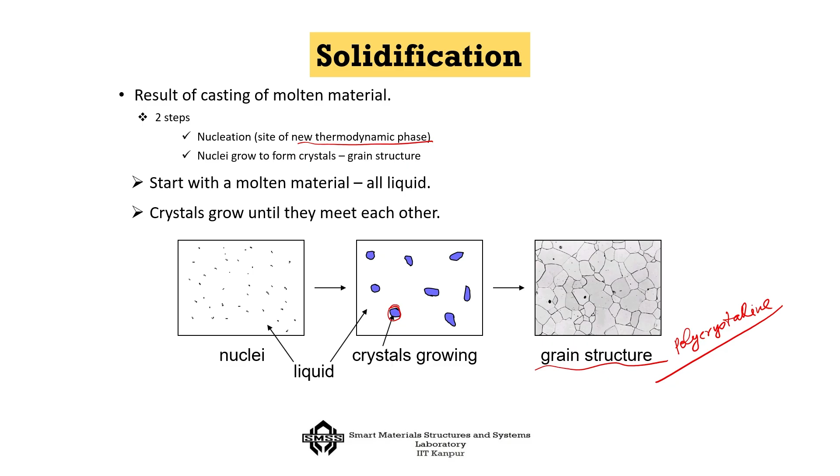We only prefer growth in one direction. Otherwise, crystals will grow and you get a grain structure which will be essentially polycrystalline in nature. This is generally what happens when a crystalline material solidifies from the molten state.

Now, what happens during that process? This process is invariably followed by defects, because even if the crystals are highly ordered, not everywhere is it getting cooled at the same rate. Because of the unevenness of the cooling rate, some parts solidify before others, so there will always be some defects coming into picture.

There will always be some deviation from the ordered arrangement, and this is the defect or imperfection in the crystal. What is most interesting is that these go both ways - the presence of imperfection may be bad in terms of failures, the strength may come down, but in some cases it can actually give very interesting good properties to the material.

The concept of alloying may also come up because of it. So it is safe to say that properties of material are influenced by the presence of imperfection. Mechanical properties of pure metal change significantly when these imperfections are present.

For example, long before, it was noted that if molten iron is solidifying and by chance carbon goes inside, then you get higher strength. Yield strength of pure copper is only 117 MPa, very ductile. But add some 30% zinc to it, you get brass, and the yield strength immediately improves to 200 MPa.

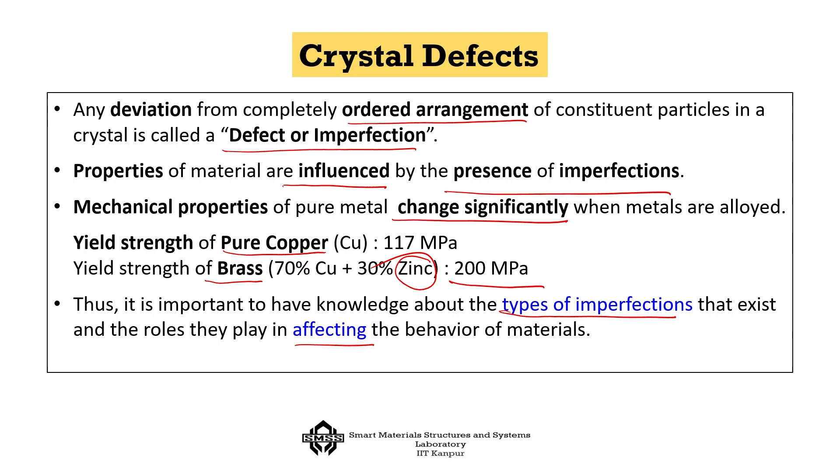So we should not always say that imperfection is bad. Sometimes if we have proper knowledge of what impurity we are adding to the system, it may actually help us. This is why it's important for us to know the types of imperfections and how they affect the behavior of materials.

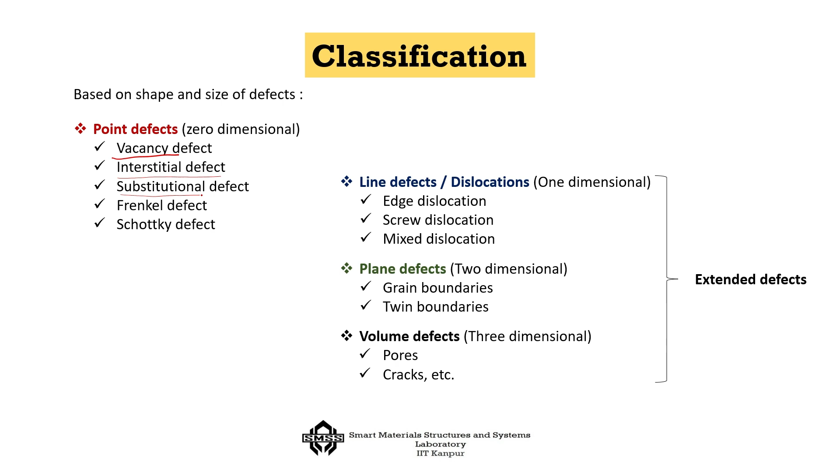So we are going to classify the defects: point defects can be of different types, like vacancy defect, interstitial defect, substitutional defect, Frenkel defect and Schottky defect - we will talk about each one. Then the line defect or dislocation, like edge, screw or mixed. Then the plane defects, like grain boundaries and twin boundaries, and then volume defects, like pores and cracks - these are three-dimensional defects.

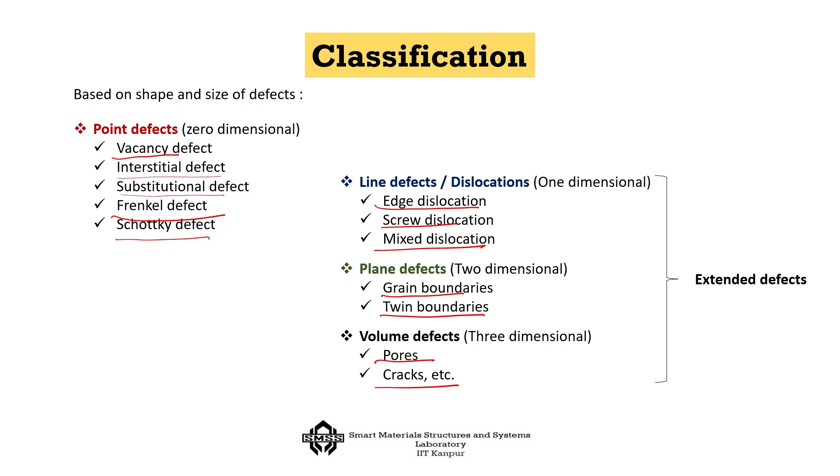So let us start with the point defects first. These are associated with the atomic sites. The very first point defect is called a vacancy defect - when an atom is missing from its regular lattice site, it is called a vacancy.

It is impossible to create any material that will be free from vacancy - vacancy will always be there. So the presence of vacancy increases the entropy or disorderliness.

If there are more vacancies, then there will be more entropy in the system. This also decreases the density of the substance. If there are more vacancies, you can actually get a lighter structure. The concentration of vacancy increases in two cases.

One is when there is an increase in temperature, and another is when there is a decrease in the activation energy. If you look at the number of vacancies, there is a distinct mathematical relationship: if N is the total number of potential defect sites, then the number of vacancies is never equal to that total, but is a part of it, defined by an exponential term.

In that exponential, QV is the activation energy, K is the Boltzmann constant, and T is the absolute temperature in Kelvin. As QV decreases, the energy required for the formation of vacancies is affected, so there will be more possibilities of vacancies forming in the system. Similarly, if temperature increases, the same thing happens: more potential sites get filled up by vacancies. So decreasing activation energy QV and increasing temperature both control the vacancies in a system.

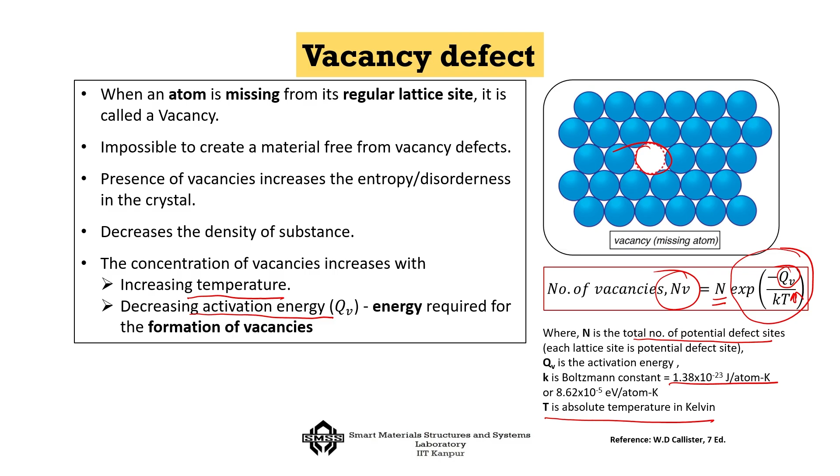Now, there can be a case where instead of just leaving a vacancy, the atom has to go somewhere. So it jumps somewhere else inside its regular lattice, crowding into some place. This is called a self-interstitial defect — it is not only vacant, but it goes and jumps into some space, creating a local distortion.

This creates a relatively large distortion and strain. Once this happens not for the same atom but for a foreign atom, then it is not self-interstitial, but simply an interstitial site or interstitial defect.

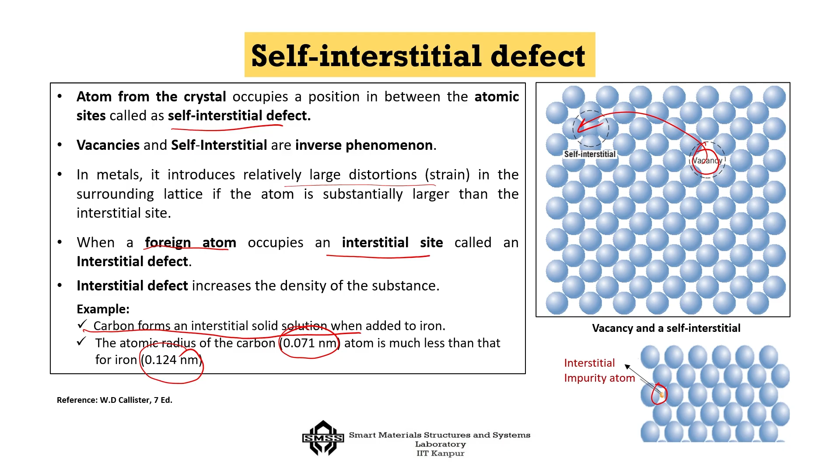Carbon forms an interstitial solid solution when added to iron, and in this case the distortion will not be much because carbon's atomic radius is much smaller, 0.071 nanometer, so it fits easily inside the space between two larger iron atoms. But if it is a self-interstitial, there will definitely be a local distortion in the system.

It is also possible to have substitution of one atom by another, which happens when the two atoms are roughly similar in size. A substitutional defect is introduced when one atom is replaced by a different type of atom. The crystal structures of both atoms must be the same, and they should have almost equal electronegativity, so that overall the atoms create an electrically neutral situation.

The substitutional atom can then occupy the normal lattice site under such conditions, giving you the substitutional defect. For example, copper at 0.128 nanometer gets substituted by nickel at 0.125 nanometer, and both are FCC, so essentially they can form a solid solution.

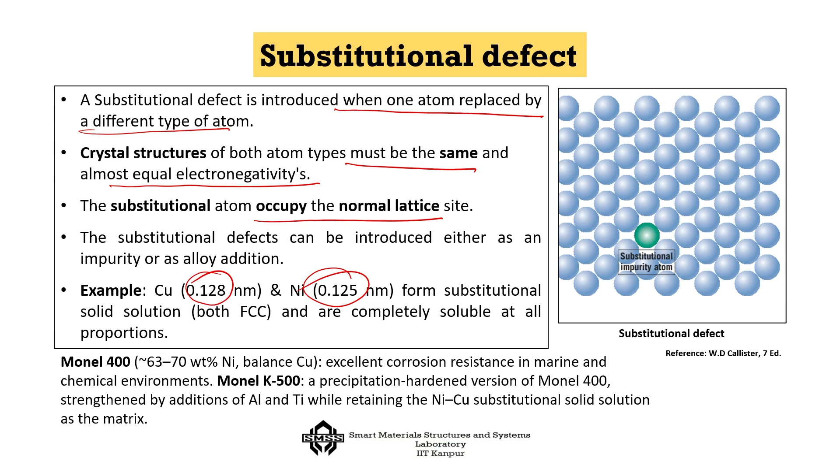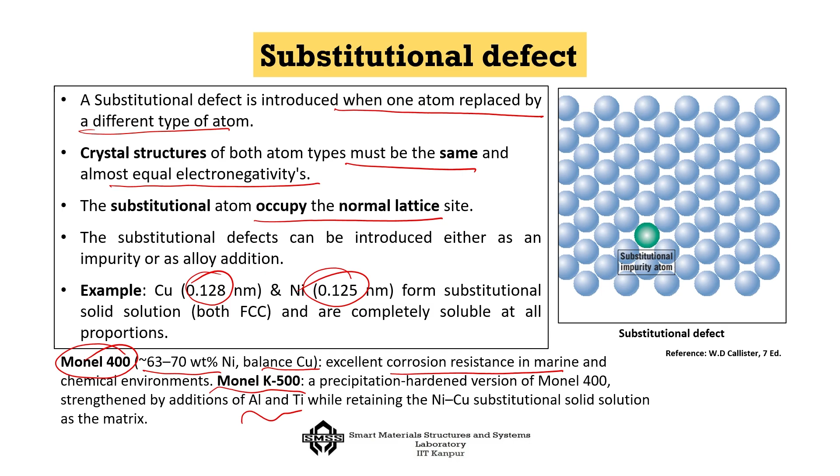We take good advantage of this, like Monel 400, which has about 70% nickel and the balance 30% copper, and is excellent in corrosion resistance in marine and chemical environments. Sometimes we also mix it with aluminum and titanium to get a new material called Monel K500, which is hardened through a process called precipitation hardening. So this substitutional defect sometimes has a very positive effect on a system.

Now there can be an effect called the Frenkel defect, which is a combination of vacancy and interstitial defect together. It occurs when an atom or ion leaves its regular site and occupies an interstitial site. Cations, being smaller in size, get displaced into the interstitial voids.

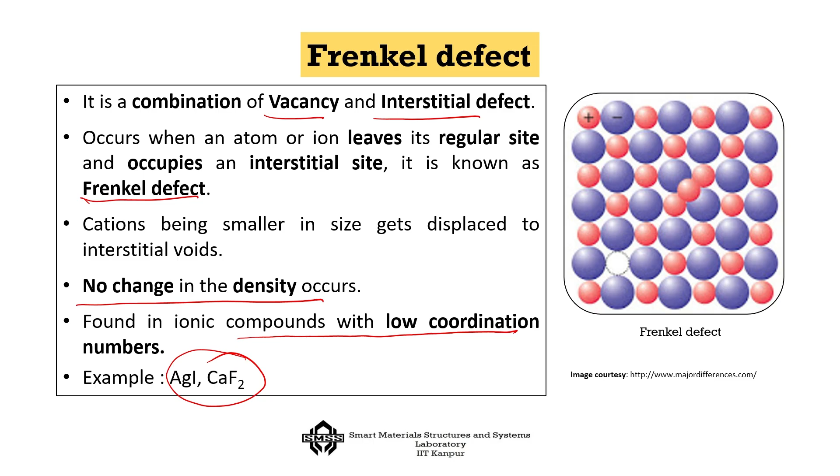No change in density occurs with a Frenkel defect, but it's found in ionic compounds with low coordination numbers, like silver or calcium with iodine or fluorine. You need this kind of ionic bond where the cation and anion can exchange itself. It's not important from our strength point of view, but can be important for other properties, like resistance change and things like that.

Another defect that is possible is called a Schottky defect. This is associated with a paired set of cation and anion vacancy, and in this case the density of the solid will be decreasing.

This is found in ionic compounds, not in metals, but in ceramic compounds with high coordination numbers. In order to maintain electrical neutrality, the number of missing cations and anions must be equal in such a case, for example in sodium chloride, potassium fluoride, etc. In both Frenkel and Schottky cases, no change in electrical neutrality of the crystal will happen, so it always occurs as a paired set.

There is also another very interesting case of point defect called the Wigner defect. This happens when there is nuclear radiation, and some atoms will be displaced because of this radiation. This can happen for any case, so it's most important for cases where nuclear moderation is done, such as in graphite. You need enough energy to cross the threshold so the radiation can shift an atom from its location to another. For graphite, a 1 MeV neutron striking graphite will create about 900 such displacements of atoms. This way you can absorb a lot of nuclear radiation power. The Wigner defect is actually good for absorbing radiation effects, and that is why graphite is used as a moderator.

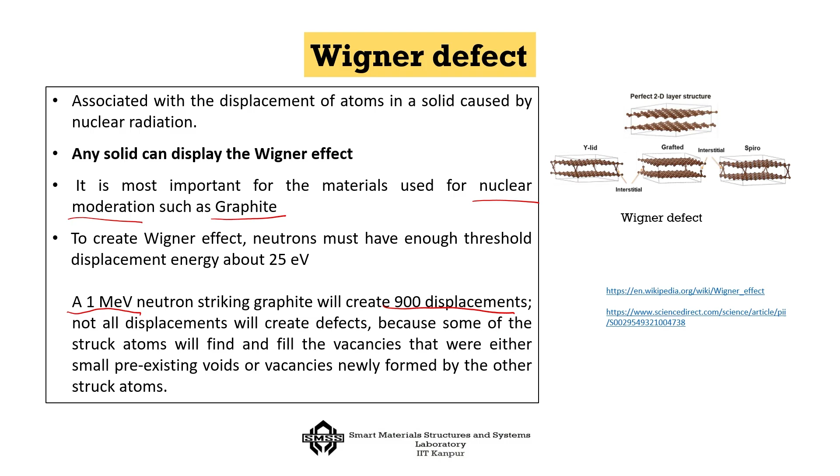Now I will talk about line defects or dislocations, which lead to plastic deformation of a system. There are two types, as I told you. The first is called edge dislocation, which happens with the introduction of an extra half plane of atoms. You can see that up to this point everything was fine, and suddenly there is a displacement and a half plane is inserted. This is where the dislocation is inserted, and this dislocation line is perpendicular to the plane of the page. The direction and magnitude of edge dislocation can be defined similar to our Miller index.

Here it can be defined with respect to something called the Burgers vector. You move around the dislocation line making equal steps in each direction. The vector that goes from finish to start is called the Burgers vector, and the edge dislocation lies perpendicular to the Burgers vector. So first you find the Burgers vector in a system. In this case you can see there is a slip plane, and you get the Burgers vector around the slip plane, with the dislocation perpendicular to the slip plane. This is what an edge dislocation is in a system.

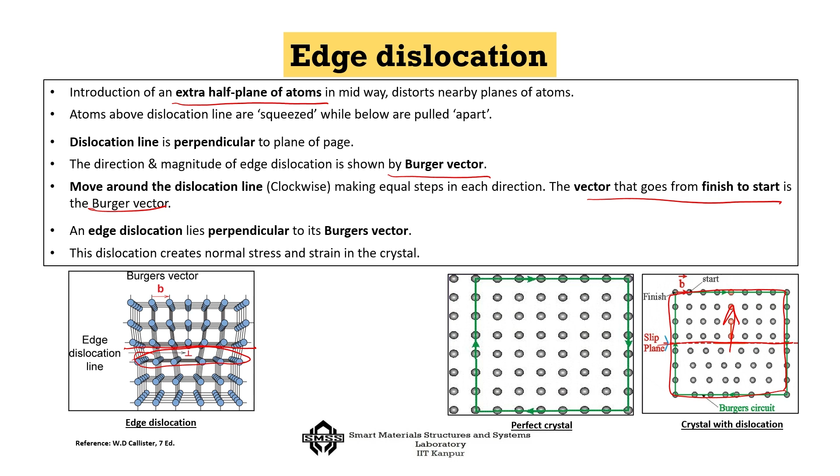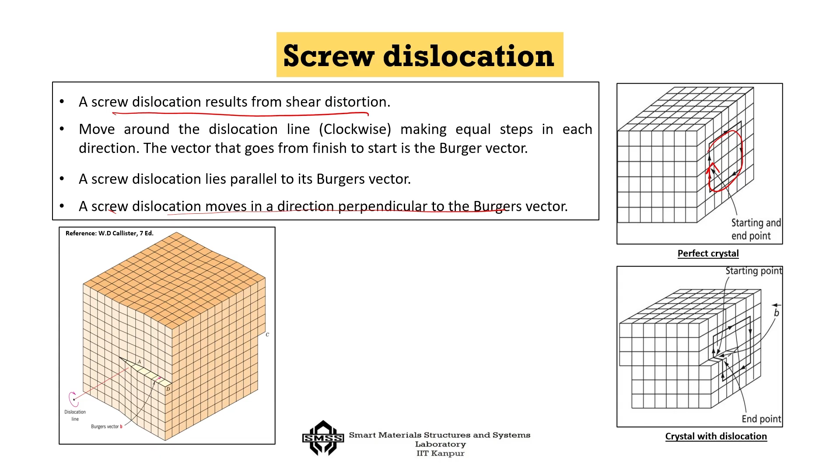Similarly, an edge dislocation is caused by translatory movement, while there can also be a rotational movement. This is because of shear, forming a screw dislocation due to shear distortion. In this case you rotate clockwise in equal steps in each direction, and that gives you the Burgers vector. This is a screw dislocation, and as you move, the direction of movement of the right-hand screw will tell you how these planes are going to move. A screw dislocation moves in a direction perpendicular to the Burgers vector. In this case, this is the way the slip plane is going to move. So these are the two types of dislocations.

Now, dislocations actually reduce the strength. If you use a single crystal, it is expensive, but this is something we always try to do for turbine blades, since there's no grain boundary in a single crystal, so no possibility of dislocation. Dislocation can only happen when there are multiple grains, causing half grains or rotations. Another way to avoid dislocation is work hardening, where you actually move all the dislocations to the grain boundaries. Another way to capture dislocation is to introduce an impurity, which we call pinning of the dislocation—the impurity, as it goes inside, stops the movement of the dislocation. These are different ways by which we can control dislocation.

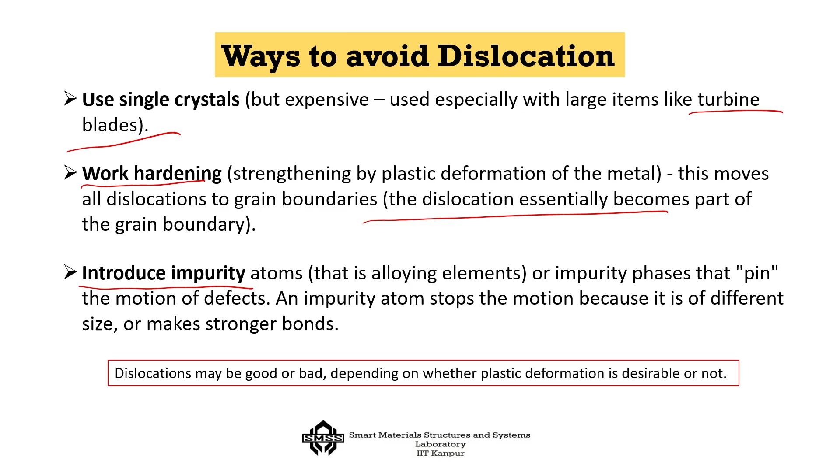Now we come to surface or planar defects. These are associated with grain boundaries, a boundary separating two grains or crystals having different crystallographic orientations in polycrystalline materials.

This is where defects can occur due to angle misalignments. This is a high angle grain boundary, and this is a small angle grain boundary. How these boundaries are relatively oriented with respect to each other, and whether there is large distortion or not, defines the chances of defect propagation between the two grains.

Naturally, a grain boundary in a 3-dimensional situation has 5 degrees of freedom, considering how the other grains are moving with respect to a grain. We need 3 degrees of freedom to define the orientation of one grain with respect to the other, and 2 degrees of freedom to specify the orientation of the boundary with respect to one of the grains. So we get a total of 5 degrees of freedom from the grain boundaries.

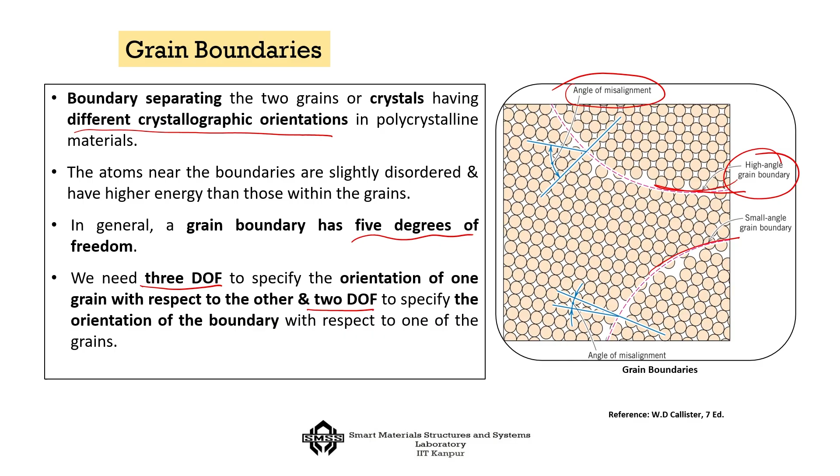Now grain boundaries play a very important role. For example, using a grain boundary, you can create an obstacle to dislocation - I told you in work hardening that is what happens. At high temperature, they tend to weaken materials as grain boundary sliding may occur, and this is why we try to avoid it for creep problems. In general, fine grained materials are stronger than coarse grained materials, because the chances of this angle of misalignment, like a high angle grain boundary, will be much less for a fine grained material.

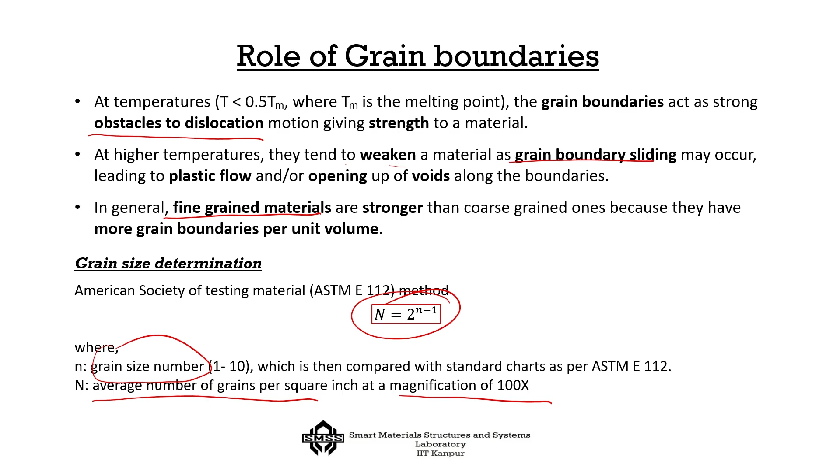So grain size determination is very important. There is a standard ASTM standard n number, defined as 2 to the power small n minus 1, where small n is the grain size number. From this you can find the capital N, which is the average number of grains per square inch at a magnification of 100x. That is the way, through a kind of microscope, we define the grain size of the system, and then accordingly define whether it is a fine grain or large grain material.

So here's a small problem: determine the ASTM grain size number of a metal specimen if 45 grains per square inch are measured at a magnification of 100x. You always have to do it at 100x, since magnification changes the number of counts. Using the ASTM method, N is 2 to the power n minus 1.

So you can take the logarithm, n will be log N over log 2 plus 1, and since N is 45 grains, you will find that the ASTM grain size number corresponding to this is 6.5.

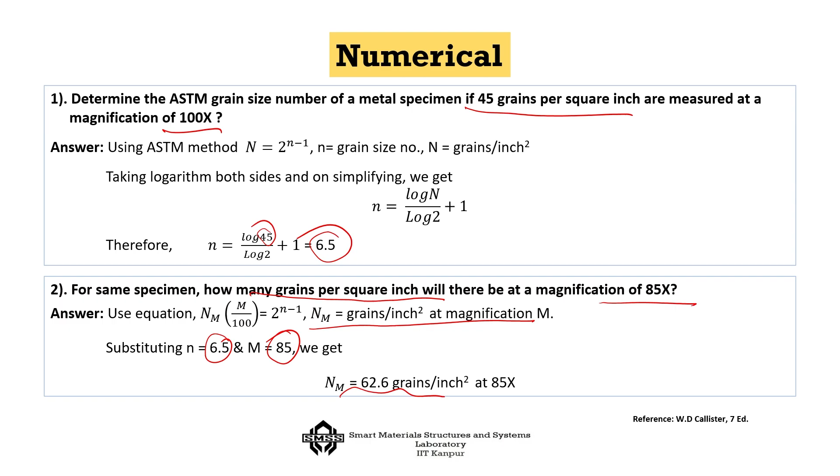And then if you want to do it the other way, for the same specimen, how many grains per square inch will be there at a different magnification, say 85x - you use the equation to find Nm, the grains at magnification m, and using 6.5 and 85 you get 62.6 grains per square inch at 85x. So as you change the magnification number, you can accordingly calculate how many grains you are expecting. That is a very important way of identifying grains.

Now let us talk about slip systems. A slip system is nothing but a combination of the slip plane and the slip direction. The slip plane is generally taken as the closest packed plane - I already told you that it is the closest packed planes which are more susceptible to slip - and the slip direction is the direction on the slip plane with the highest linear density.

For example, FCC has the 111 family of planes which are the slip planes, and as each plane contains 3 of the family of 110 directions, it has a total of 12 slip systems. The more the slip systems, the higher the possibility of ductility of the material. BCC will have 6 planes, and 2 directions each, so this also will have 12 slip systems.

However, for BCC, the slip plane is not the only thing - you will see that the linear density is quite smaller, and hence it needs more energy to actually make it ductile. So having many slip planes is essential, but not a sufficient condition by itself.

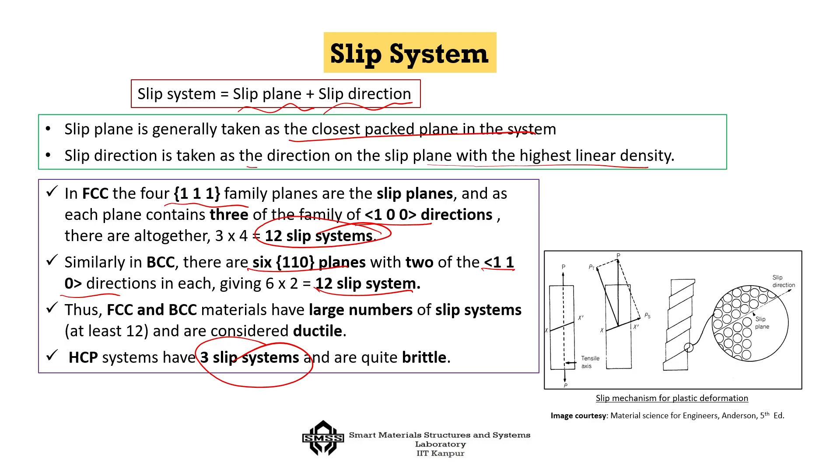HCP can be defined this way because HCP has only 3 slip systems and is quite brittle. So a low number of slip planes would invariably mean the material would be brittle, but it is not a sufficient condition - you also have to look into the linear density, and together these will let you decide whether a material will be ductile or not.

Now, another important thing in terms of crystals is the twinning of the crystal. This occurs on definite crystallographic planes, where each plane is basically the mirror image of the other. This can happen as mechanical twin, using shear forces, occurring in metals of BCC and HCP crystal structure, and there can be annealing twin, that is deformation due to heating and cooling. One particular material which shows this twinning and plays a very important role is called the shape memory material.

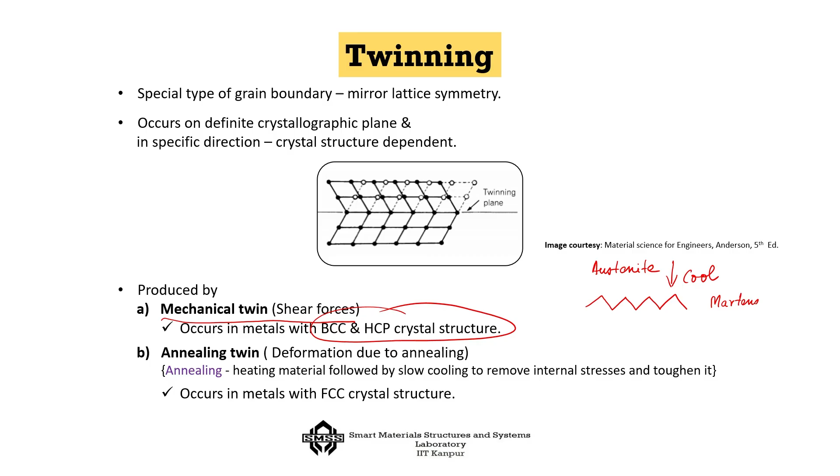It is an alloy of nickel titanium, and if you actually from the parent state, austenite, if you cool it, then you will get these self-adjusting or twinned states, at the martensite state, and this happens for shape memory alloys, or SMAs.

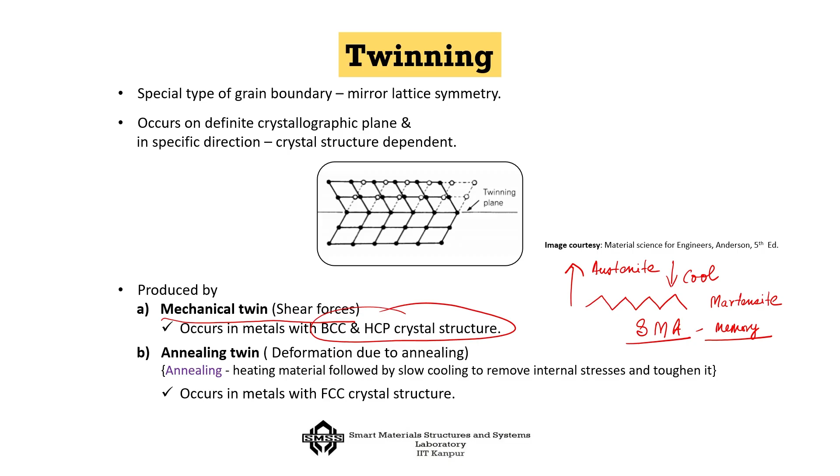Twinning plays a very important role in terms of defining the memory effect, whether a material is going to have memory or not. Usually in such a case, this twinning will make it highly deformable, you can deform it, and then if you heat it back, it goes back to austenite and it remembers the exact shape.

Of the 3 common crystal structures, BCC, FCC and HCP, the HCP structure is most likely to twin generally, but FCC and BCC structures will not usually twin because slip is more energetically favorable. Twinning occurs at low temperature and high rates of shear loading condition, and where there are few slip planes present. So either there will be slip or there will be twinning, and if slip is less, invariably the chance of twinning will increase, giving a small amount of deformation compared with slip, but it becomes very flexible and you can largely deform from twinning to detwinning of the system.

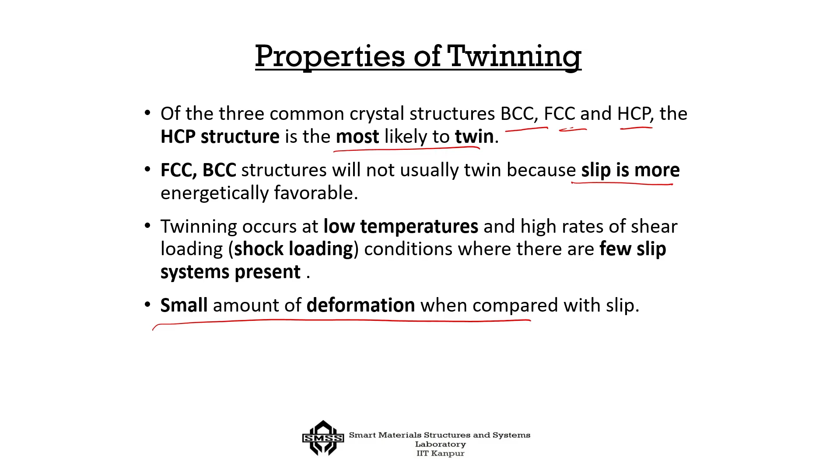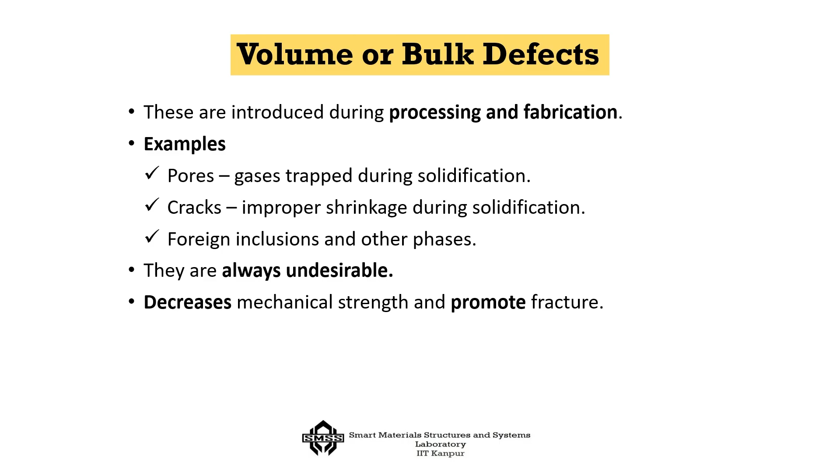Now we come to the final one, that is the volume or bulk defects. These are large and undesirable situations because this is going to create pores, like gases trapped during solidification, cracks, improper shrinkage, or foreign inclusion and other phases. So they are almost always undesirable because they decrease the mechanical strength and promote fracture of a system.

As I've given you the example of chalk, it is a very porous material, and hence its strength varies a lot, so you have to use a Weibull modulus to actually see that. Porous materials always have this problem, but having said this, porous materials can be good in certain other cases. For example, porosity makes it lighter, so if you want to decrease the weight, it is good. Secondly, porosity can actually help, like for a ceramic material, to make it sustain higher temperature, giving high thermal resistance.

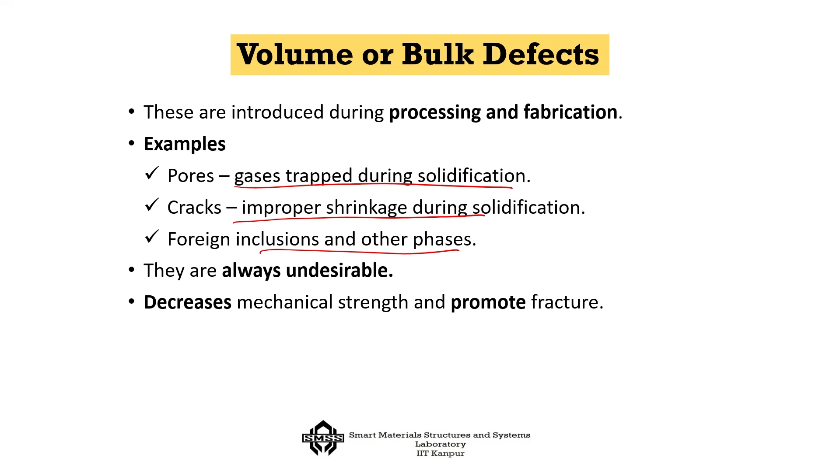In some cases, you can actually fill up the pores with materials like viscoelastic materials, then you get a very interesting property of large damping. So a porous material is good if you can absorb a secondary phase inside it. Thus there are always chances of improvements for a porous material.

Now I am going to summarize whatever I have talked about. First of all, we have talked about vacancies, and the properties it affects are solid state diffusion and mechanical creep, with application in annealing. Substitutional defects affect electrical conductivity and mechanical strength, you can actually make solute hardening of alloys using this, and also create semiconductors in a substitutional system.

Interstitial defects affect magnetic coercivity, dielectric strength, optical transparency, all of them are possible, and you can get strong permanent magnets, build capacitors, and achieve coloring of glasses and plastics. So interstitial is good in some cases.

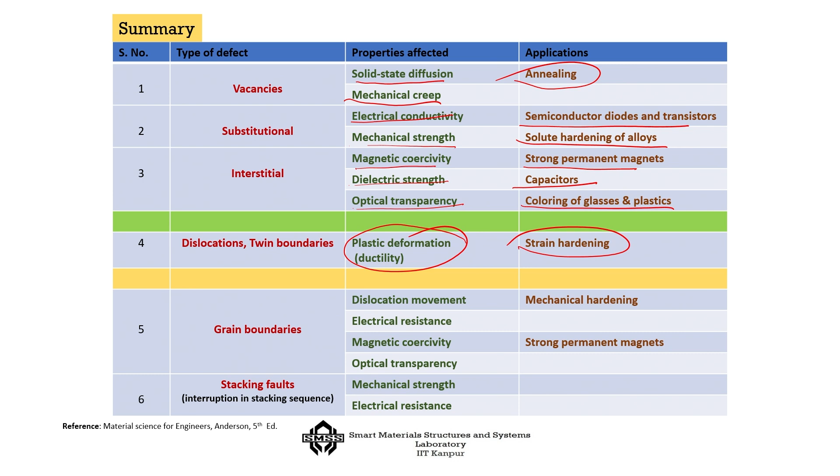Dislocations or twin boundaries can help in plastic deformation, and can be used effectively for strain hardening. Grain boundaries, if they happen, affect the dislocation movement, electrical resistance, magnetic coercivity and optical transparency, so this can be used for mechanical hardening and also in strong permanent magnets.

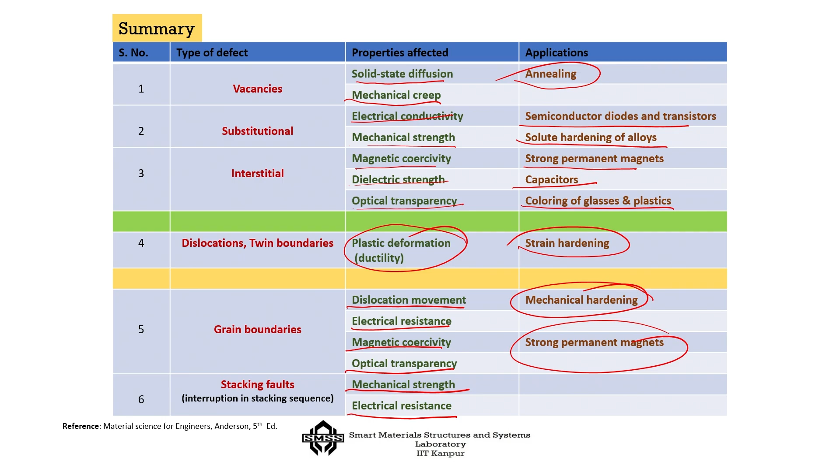Finally, if there are stacking faults, an interruption in stacking sequence, it is going to affect the mechanical strength and the electrical resistance. So defects can play a positive as well as a negative role depending on the context where we apply it. These are the important things from a crystal structure point of view that we have to keep in mind and accordingly select materials. This is where I will close this discussion now. Thank you.